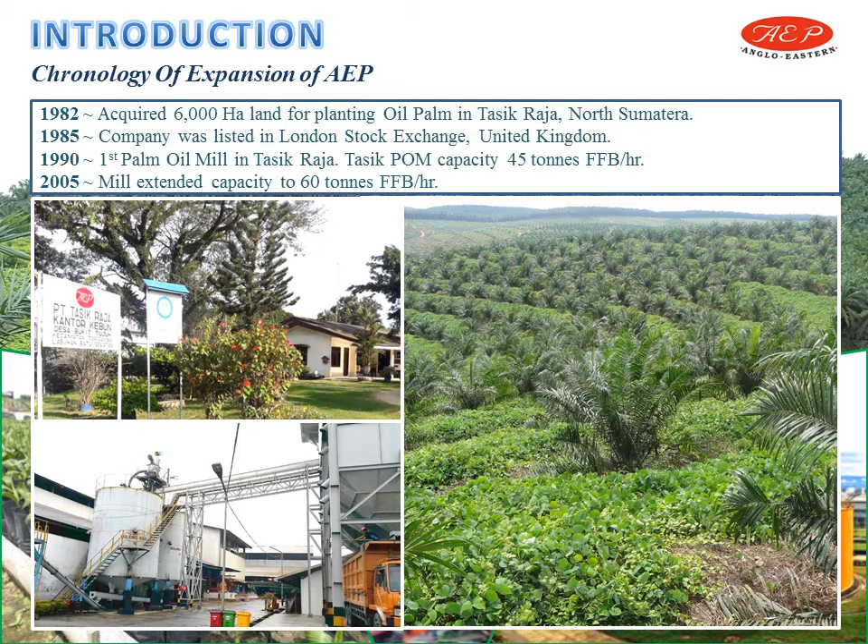The company continued to expand by adding 6,000 hectares of land in Tasik Raja estate and planting with oil palm. The first palm oil mill with a capacity of 45 tons per hour was built in Tasik Raja in 1990, which was extended much later in 2005 to 60 tons FFB per hour.

The expansion continued in Bengkulu with purchase of land and planting with oil palm. The second palm oil mill of capacity 40 tons FFB per hour was built in 2002 in Puding Mas estate, and later extended to 60 tons FFB per hour in 2004.

In 2004, the third mill was built in the oldest estate of Blankahan. Due to the increase in FFB from smallholders, it was later extended to 40 tons FFB per hour in 2011.

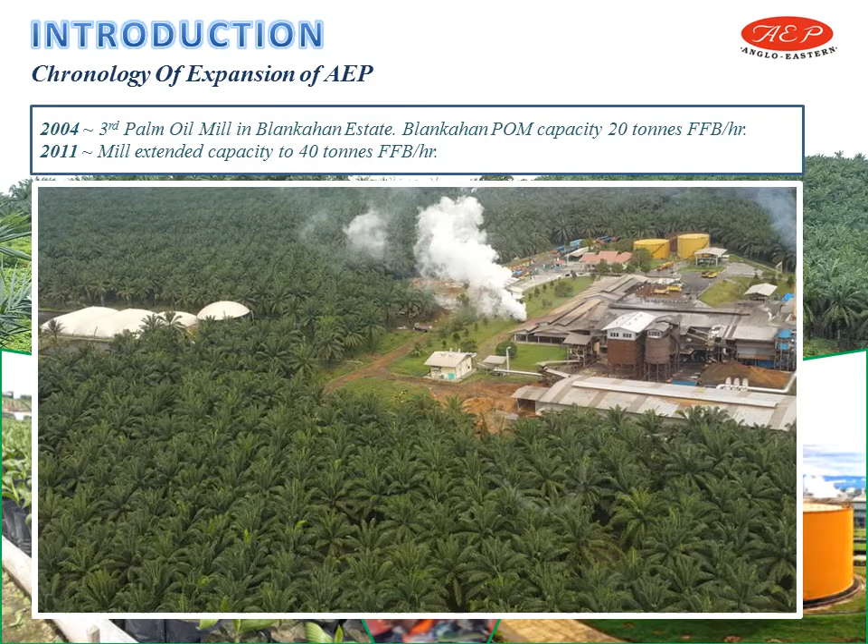In 2004, Bina Petrijaya estate in Riau was acquired, and the fourth palm oil mill with a capacity of 45 tons FFB per hour was built in the estate in 2007.

The fifth palm oil mill with a capacity of 45 tons per hour was built in Somindo estate, Bengkulu, in year 2010.

The company expanded further to central Kalimantan by acquiring 19,200 hectares of land. And the sixth palm oil mill with a capacity of 45 tons FFB per hour was built in this SGM estate.

AEP has shown a steady growth in FFB production in our estates, from 168,000 tons in 1998 to 898,000 tons in 2016.

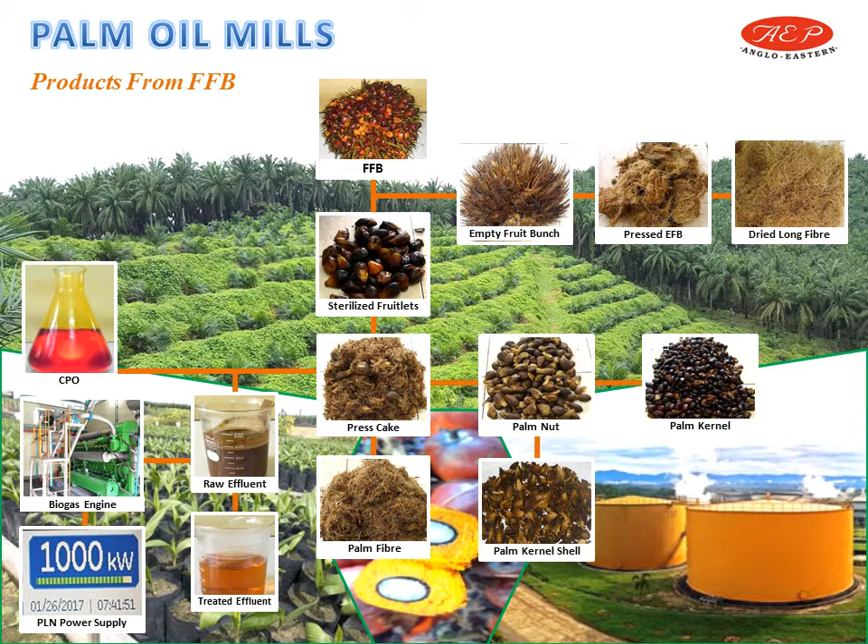The palm oil mills process the FFB through various stations to produce the main products, which are CPO and palm kernels. The other saleable products are palm kernel shells, dried long fiber, and electrical power from biogas.

The FFB, after weighing, is unloaded by the trucks into hoppers at the loading ramp. The FFB is then sterilized in pressure vessels with a steam pressure of 3 bars to enable the fruitlets to be stripped from the bunch and soften the mesocarp.

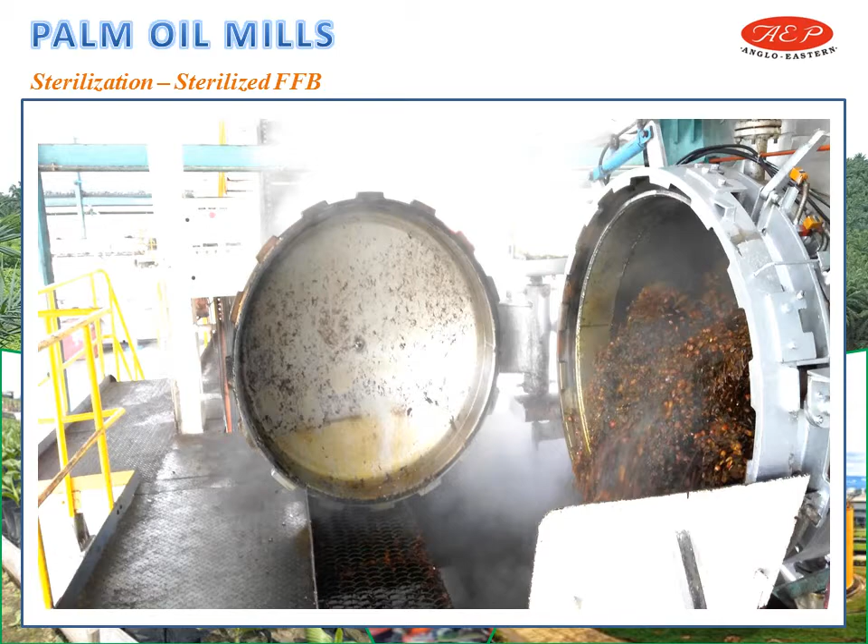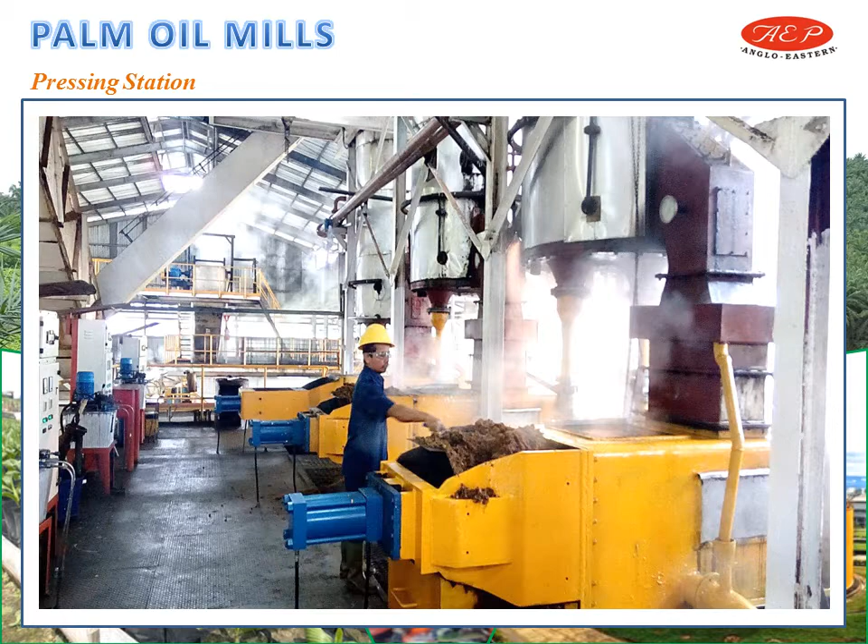The stripped fruitlets are then pressed in the pressing station to press out the crude oil from the mesocarp. In the clarification station, the crude oil is separated from the water and solids, and then stored in huge storage tanks for sale.

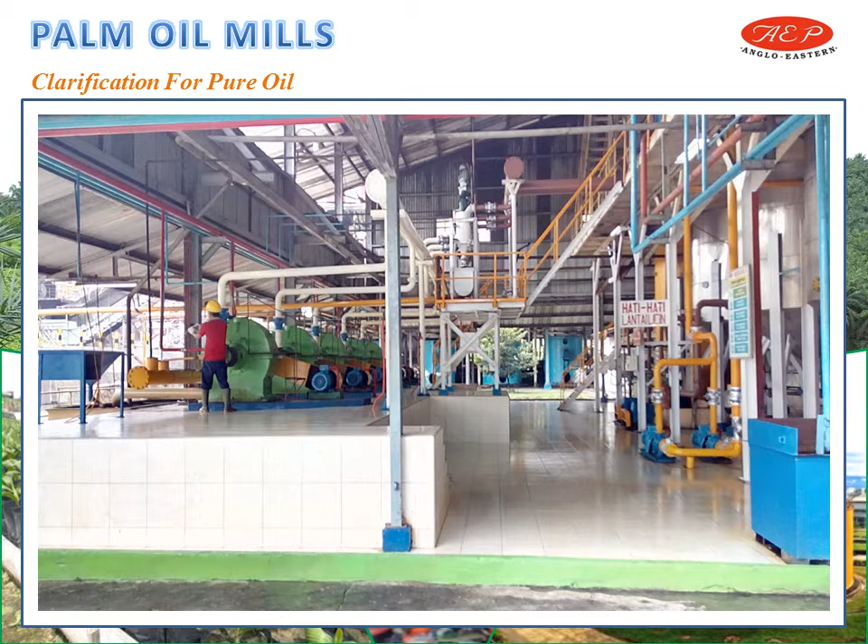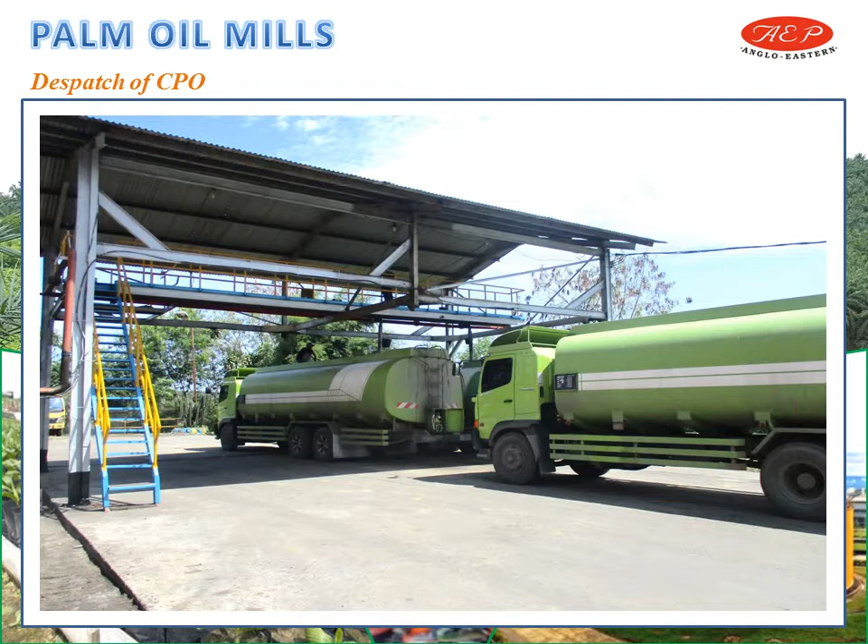The CPO is then dispatched by road tankers to the buyers, which are local refineries.

The palm kernels are extracted from the palm nuts and then dried before being stored in bulking silos. The kernels are then dispatched by trucks to the buyers, who are mainly local kernel crushing plants.

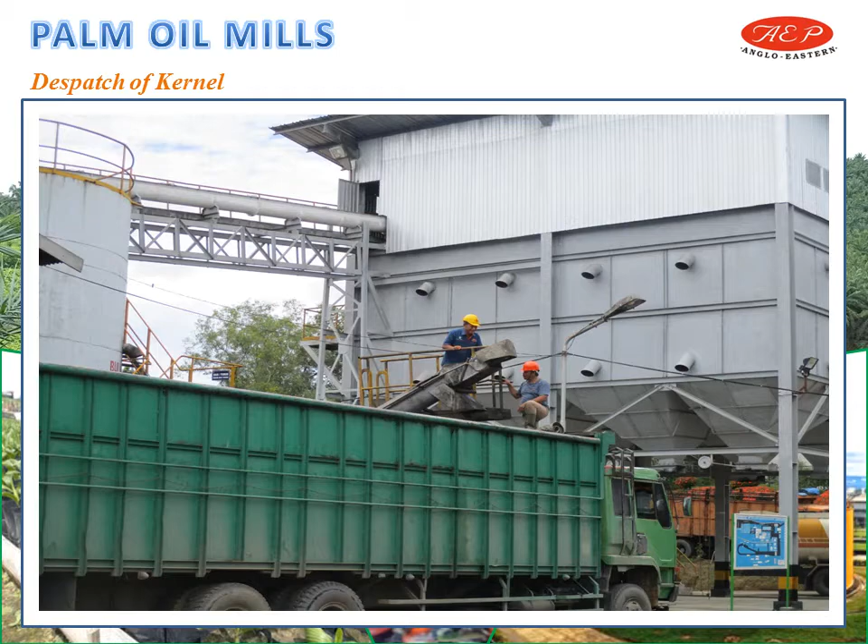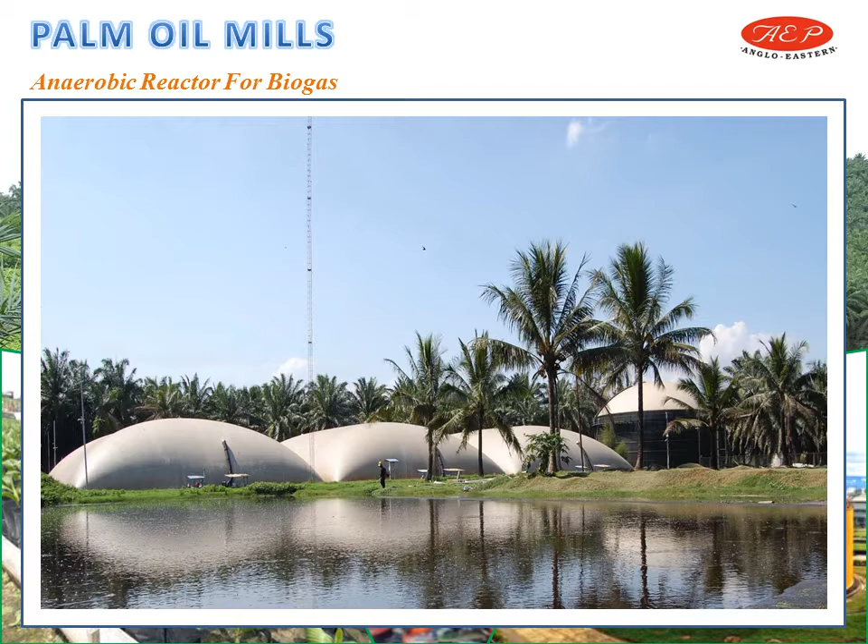The palm oil mill effluent is treated in anaerobic reactors, where the biogas is trapped under covered membranes. The trapped biogas is then sent to the biogas purification plant to remove impurities such as moisture and hydrogen sulfide.

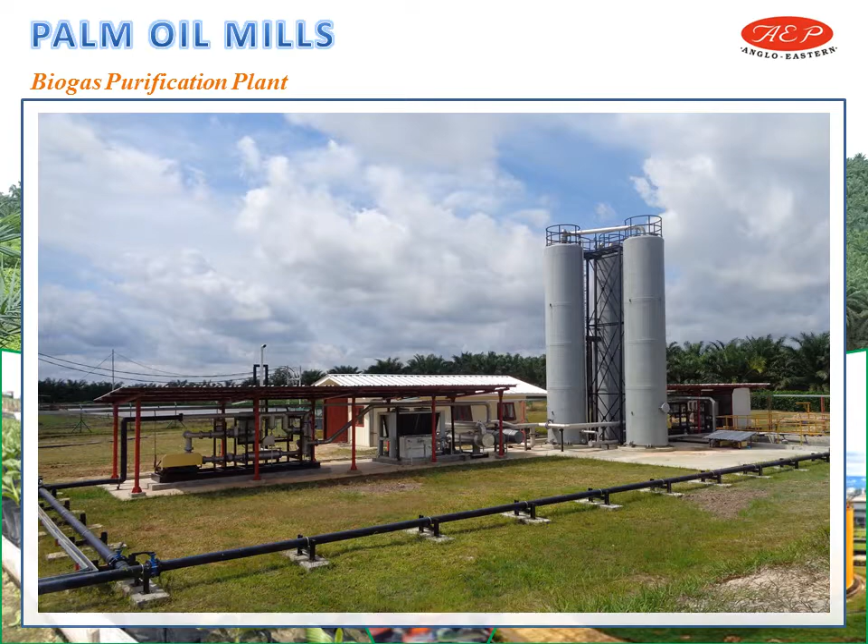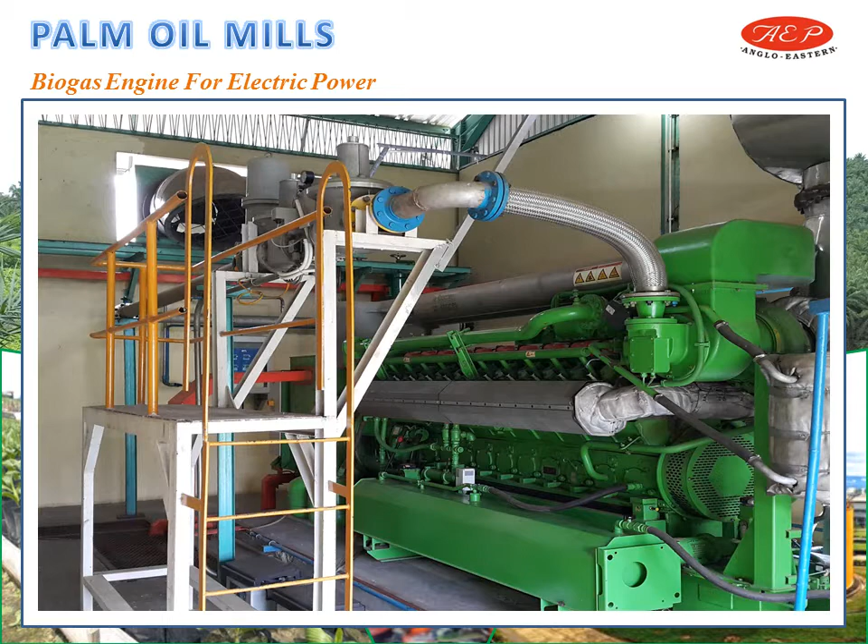The purified gas, which has a methane content of about 60%, is piped to the biogas engine, where it is utilized as a fuel to generate electric power. The generated electric power is sold to the State Electricity Board by supplying to the national grid.

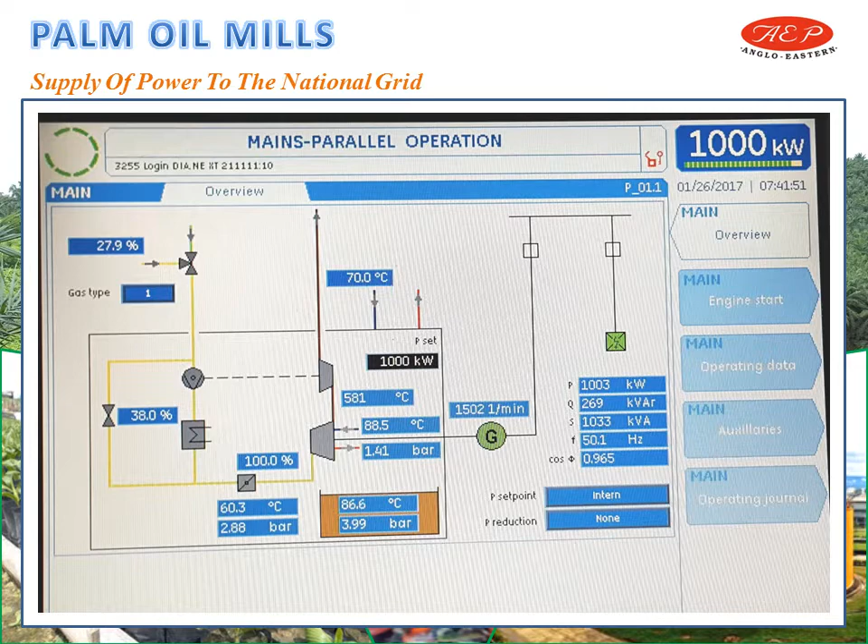In one mill, the empty fruit bunch, which is a waste product, is processed to extract the dried long fibers as a product. This DLF is baled and exported in containers to overseas buyers.

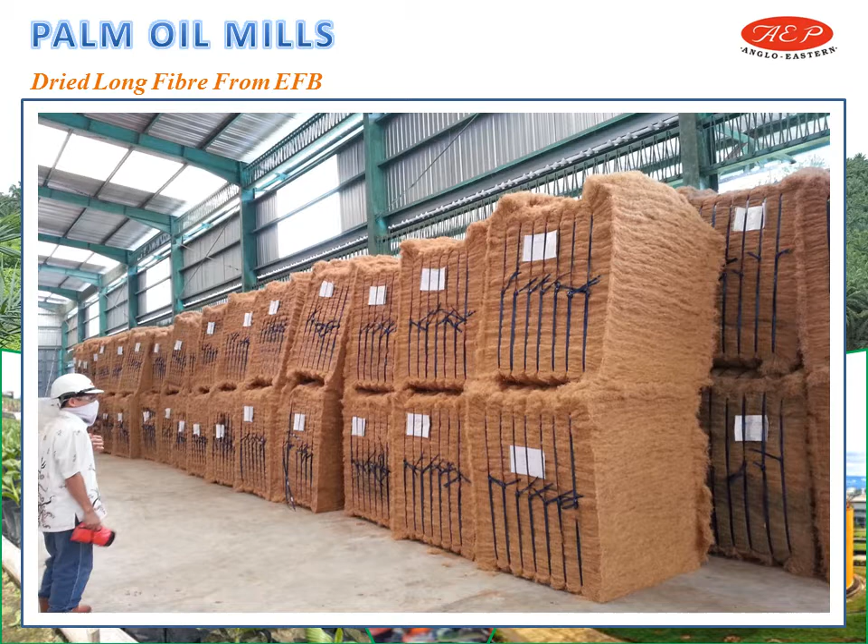The effluent, after producing biogas in the anaerobic reactor, undergoes further aerobic treatment by aeration in steel tanks.

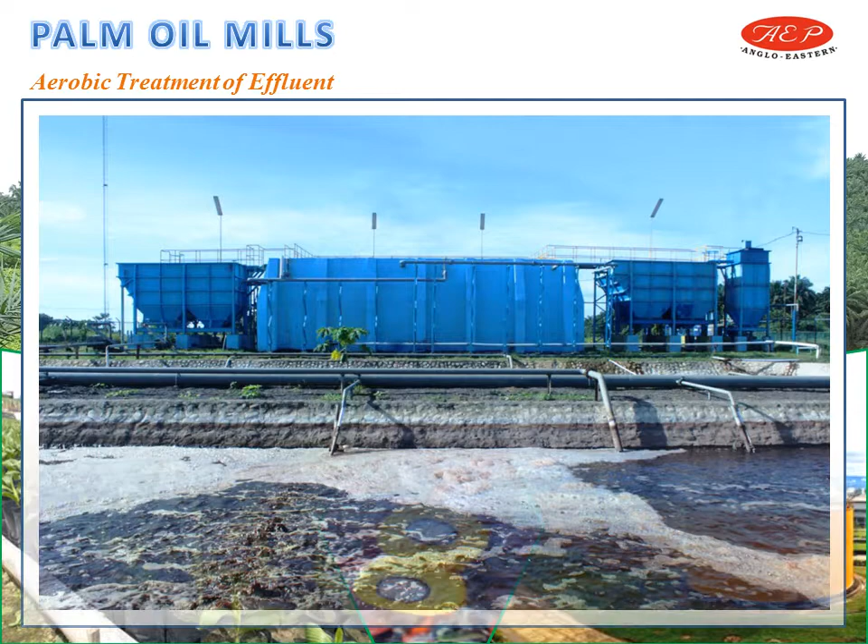AEP has obtained ISPO certification for many of the estates, and the certification process is in progress for the rest of the estates.

AEP is a responsible player in the plantations industry and as such is committed to CSR. Aid has been provided to the victims of the tsunami in Aceh.

Donations are given to orphanages during festivals. Housing has been provided to the earthquake victims in Aceh.

Churches and mosques have been built for the people of different faiths in the various provinces. Schools and transport facilities have been provided in our estates.

Facilities for sports are provided in almost all of our estates. Natural beauty is preserved in all our estates.